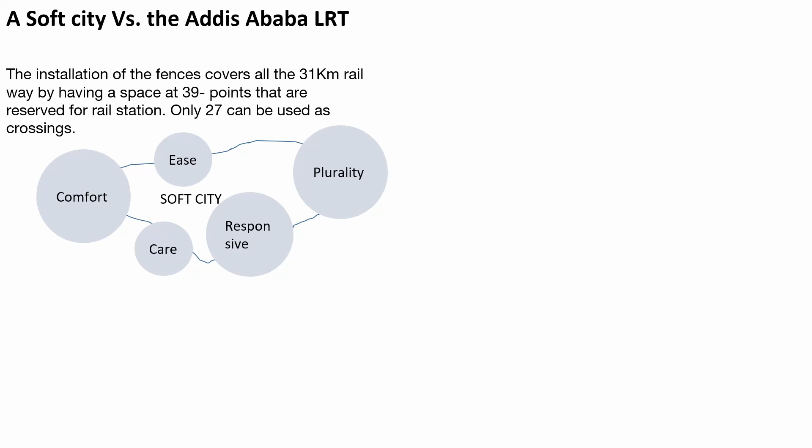Let's see how the installation of fences has hindered people's movement and economic capacity.

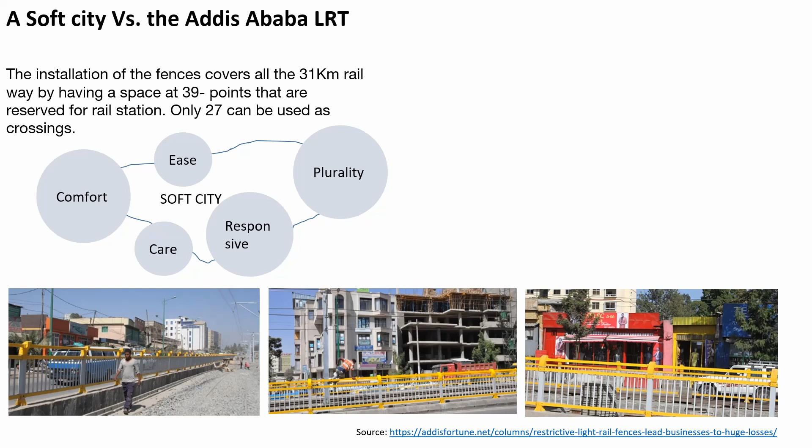Nearly 27 crossings have been provided of the 39 points reserved for the rail station, and this creates quarrel among the officials, the inhabitants, and the traders.

The officials say they are providing this to protect against accidents happening. But on the other hand, inhabitants and traders say they prefer jumping to cross the roads because the difference between the two zebra crossings is around 800 meters on average. The day after fences were installed, the number of customers who visit us significantly decreased, said the traders.

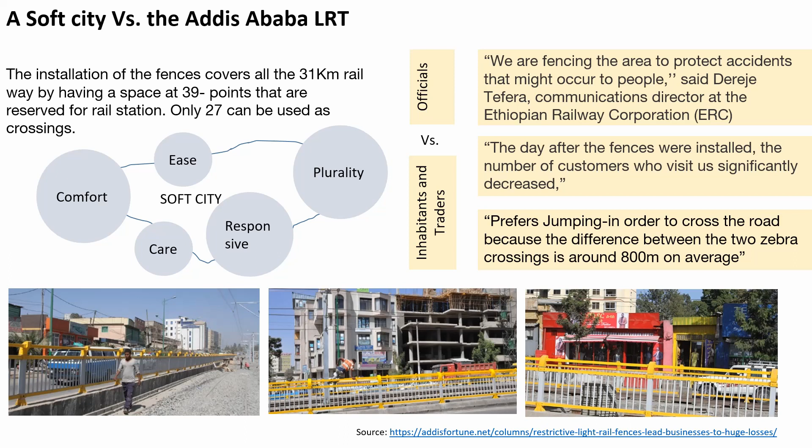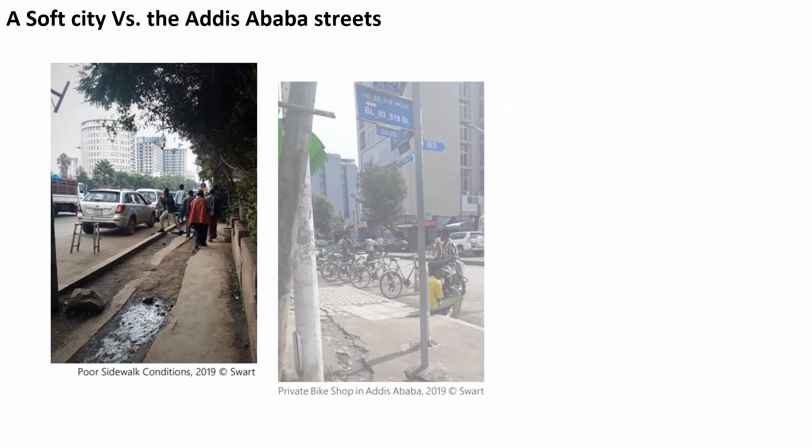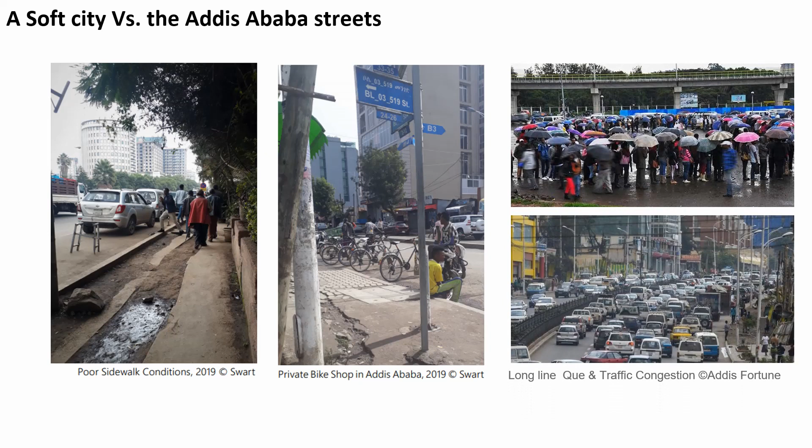As you can see from the pictures, the complete car-oriented development leaves poor sidewalk conditions and reduced provision and inaccessibility of bike sharing. The long queue waiting for taxis or buses to come, and the traffic congestion, are among the biggest challenges for commuters in their day-to-day lives.

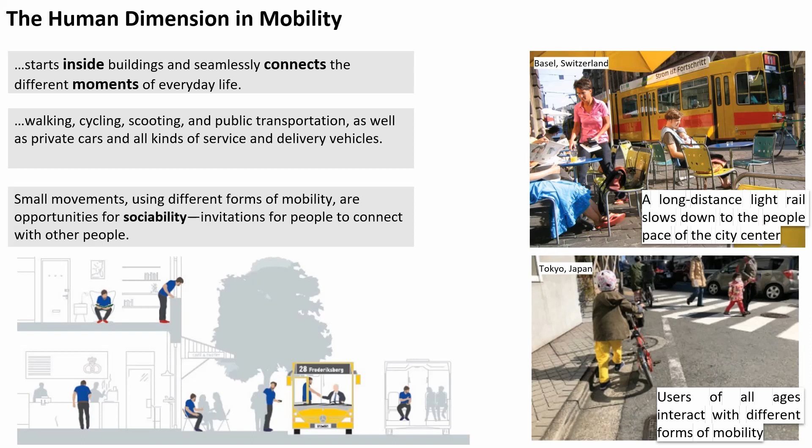Mobility starts inside buildings and connects different moments in everyday life through walking, cycling, scooting, public transportation, or other forms of transportation systems. Small movements around the neighborhood for crossing the street, getting our bike to the bike lane, and waiting for the bus. All of these small movements using different forms of mobility are opportunities for sociability and invitation for people to connect with each other.

The making of streets should prioritize pedestrians, for example through continuous sidewalk, which allows safe, smooth, and uninterrupted walking, and also providing kiosks or any commercial or social activity in the central districts. This brings a sense of security for the pedestrians.

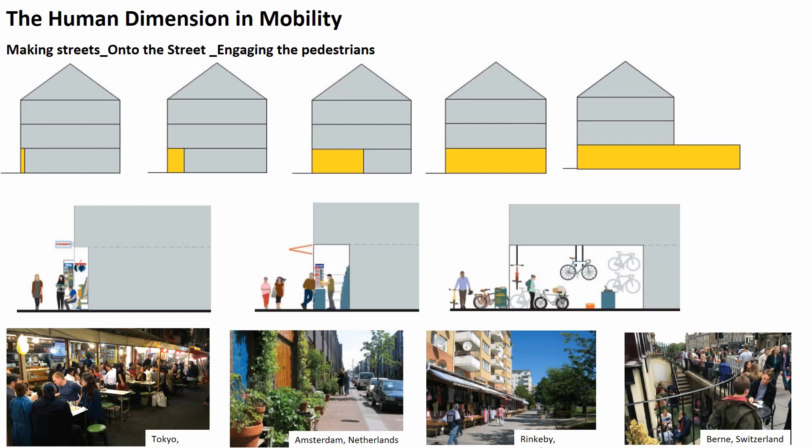The other feature that can be seen in most vibrant streets is that they engage the pedestrians in different forms, from transparent facade to the whole ground floor extended uses. This could be applied in integration of the streets with the ground floor uses of roadside buildings.

The other feature that could be incorporated on the making of streets could be living with weather. As more and more people live in densifying built environments, the importance of spending time outdoors, encountering natural phenomena, and learning to live closer to the seasonal cycles of the weather increases.

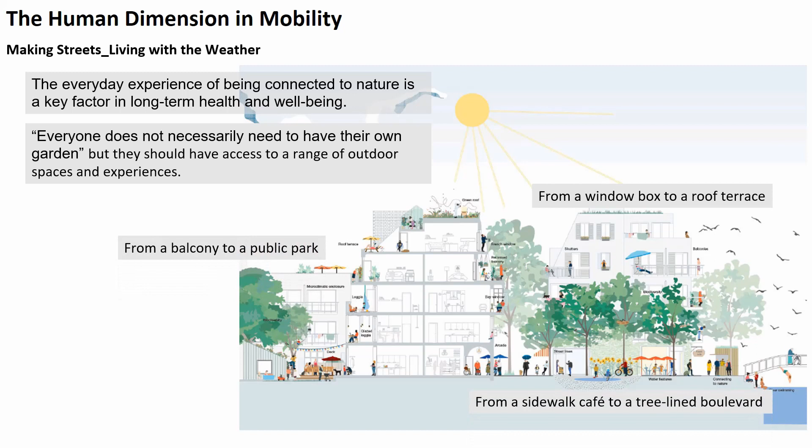Everyone does not necessarily need to have their own garden, but at least they should have access to a range of outdoor spaces and experiences, from a window box to a roof terrace, and from a balcony to a public park, or from a sidewalk cafe to a tree-lined boulevard. These well-designed streets can bring them closer to nature and help them live better with weather.

Integrating cycling in mobility design not only provides a non-motorized transport system, but also protection for pedestrians from motorized traffic. Even if the rate is slow, we are experiencing growth in cycling around the world, since bicycles come in different sizes, from tiny child-sized kick bikes to big cargo bikes, and there are also other small-wheeled phenomena like skateboards, roller skates, and kick scooters.

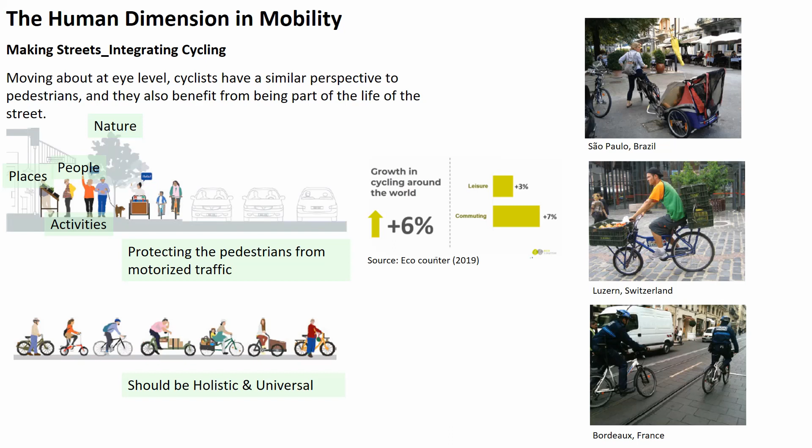The mobility paths should be designed in a holistic and universal manner. The design of streets may differ according to the standard, the context, the function, and the speed limit. According to the National Association of City Transportation Officials, in less than 30 km per hour speed limit, the car and cyclists can share the same or different lane.

The last but not least that should be considered on the making of streets is the proportion and scale of the built environment and open spaces. Generally, a street corridor with a more vertical proportion gives a more intense urban feeling, whereas a street corridor with a more horizontal proportion gives a more relaxed feeling.

Different street proportions create different experiences. For example, a street corridor that has shorter buildings on either side relative to the rest of the ingredients will be a less intense neighborhood business district.

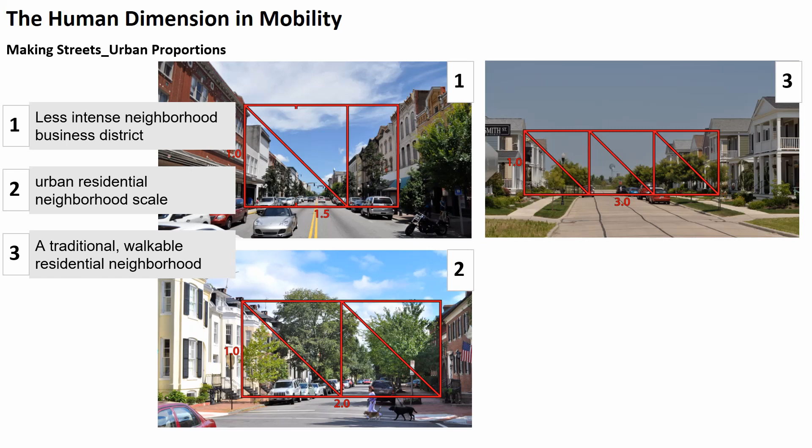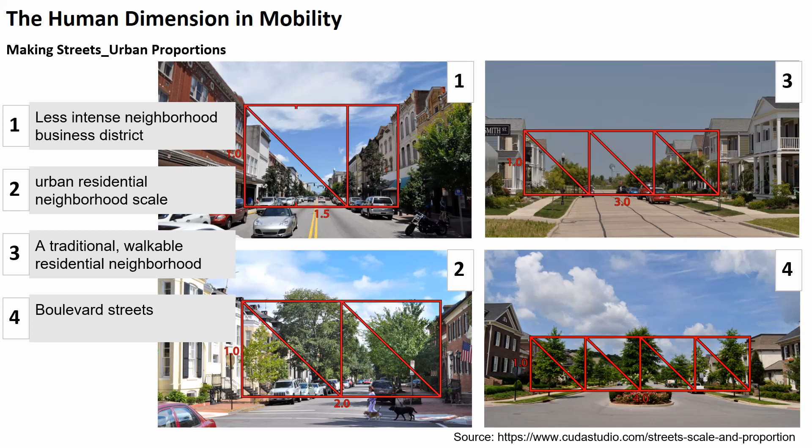Medians, which create boulevard streets, can vary the proportion of a street corridor, giving another quality to the experience. What we can observe from all this is that the street corridor formed by buildings, like a hallway or a corridor in a house, the placement, height, opacity, transparency, and architecture of its walls completes the flavor of the visitor's experience. Urban buildings are part of the collection of ingredients which creates the scale and emotion of a street corridor, whether that scale is dense downtown or a residential quarter.

Let me conclude my presentation with 2 points. First, the modernist planned city leaves us with congestion and segregation, because these separated zones and functions create a huge need for transportation to access assets needed to live a full life.

We need to restructure our cities from zone city to a compact city. And urban mobility is also about social mobility—the business of getting about connects you not just to where you are going, but also the places you pass and the people you meet on the way. Therefore, the design of mobility should incorporate the physical and behavioral aspects of design.